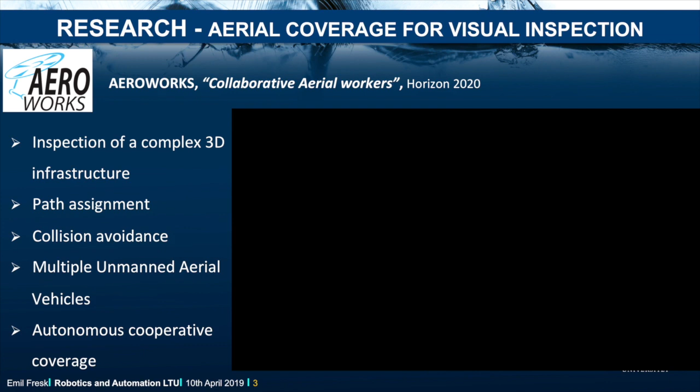So let me then start with one of our main projects. This one was called AEROWORKS, which was for collaborative aerial workers.

I will just check, is it muted? Because else it would go crazy. Yes. Just so we have it going.

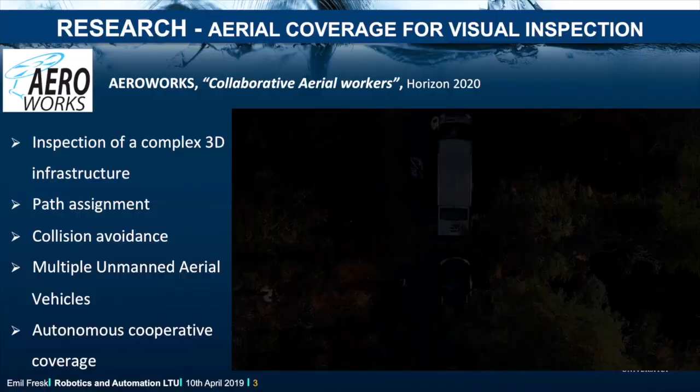The whole idea of AEROWORKS was that given infrastructure, in this case from our field trials in Bureå, Skellefteå, these wind turbine power plants or other types of infrastructure, inspecting this is currently done with rope teams. So you have people hanging with ropes from these tall structures. And it actually turns out, unfortunately, that people die due to failures of safety equipment or just simply being in a hazardous environment.

But what we want is this. Why would you send people when you can send drones? If this one can do all of the pre-inspection, so you only need to send people when you absolutely have to, I would always send the drone. However, making an application like this happen is not something that happens overnight. This was almost 4 years of research to have a fully autonomous drone, so there's no pilot.

It's simply a go button, where you have given the drone, or actually in this project multiple drones, the mission to inspect this infrastructure. And then it comes down to how they should fly in order to not collide with each other, not collide with the infrastructure, not collide with the forest below. All of this comes back to path planning algorithms, which in a sense is AI. They need to understand that I cannot fly into a tree, I cannot fly into an infrastructure.

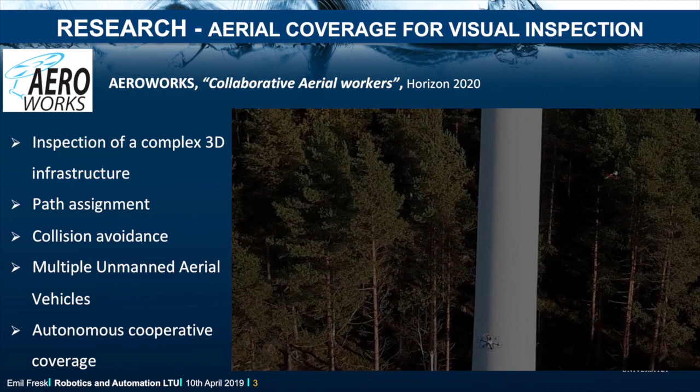And here, from the final part, when we have actually multiple ones. And what we are very proud of with this is also to be able to say that this type of system works when GPS fails. I don't know if you realize how reliant you are on GPS, but these types of systems work without GPS. Actually here, at this wind turbine, GPS does not work. It's a bit interesting. Simply because the wind turbine is such a tall tower, it actually disturbs GPS.

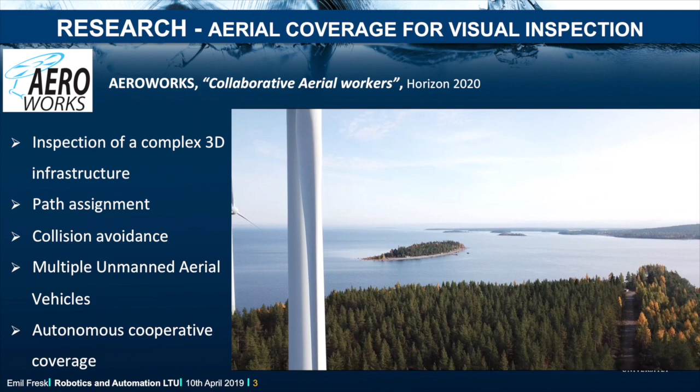But at the end of this project, AEROWORKS, we were actually awarded by IVA one of the top 50 engineering works for this work. And now, just recently, that was 2017, now in 2018, we were awarded one of the top 100 innovations for this work. So we hope that this will actually be picked up a bit more by, let's say, the industry.

But if I continue, what we're currently working on is the continuation. Before, we were inspecting large structures outdoors. What can we do if we have to go indoors? Or even worse, underground? In mining, I guess everyone has heard of some accident happening in mining. Tunnels collapsing, the roofs are not stable after blasting. What we want to come to here is

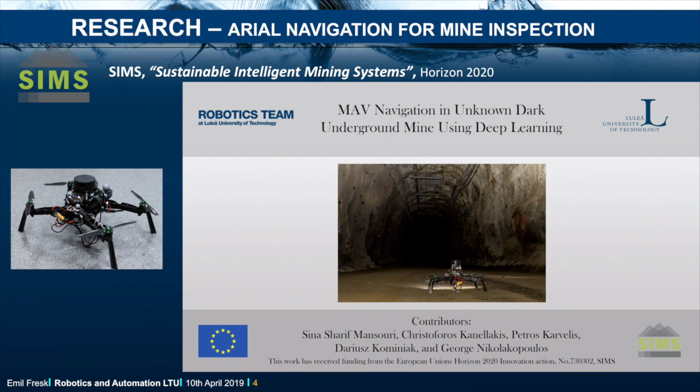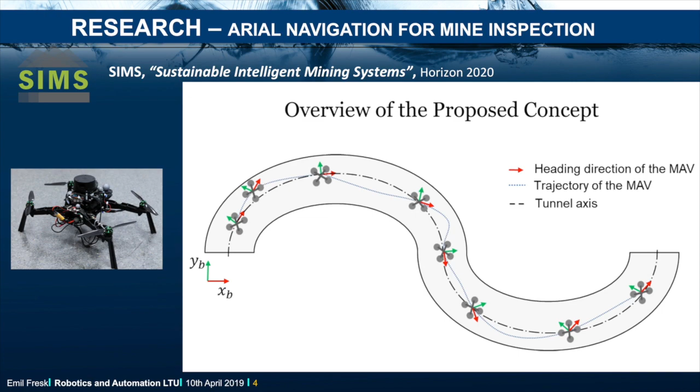use drones. So, what we've been currently working on, just to give an idea, here in SIMS, which is Sustainable Intelligent Mining Systems, is that we want these drones, without knowing the tunnels, or knowing a tunnel network from the mine, to be able to go, inspect, and report back: are these tunnels safe for operation? Or it could also be simply that there has not been a collapse of a tunnel.

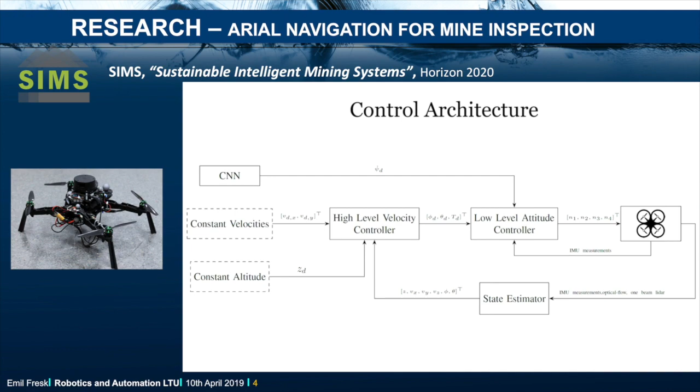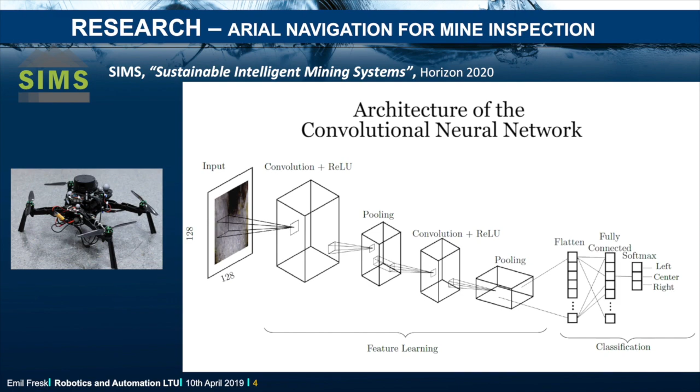And what we're going to see in this work is that to detect how to go into tunnels, you actually need machine learning. It turns out that many of our normal methods do not work for detecting tunnels. So here we actually have a convolutional neural network system that detects where the center of a tunnel is, to simply continue exploring tunnels.

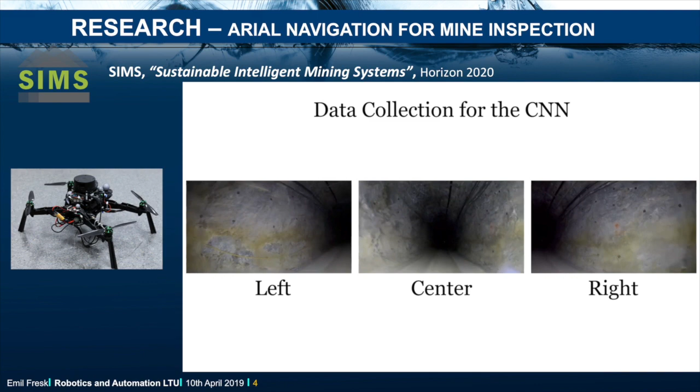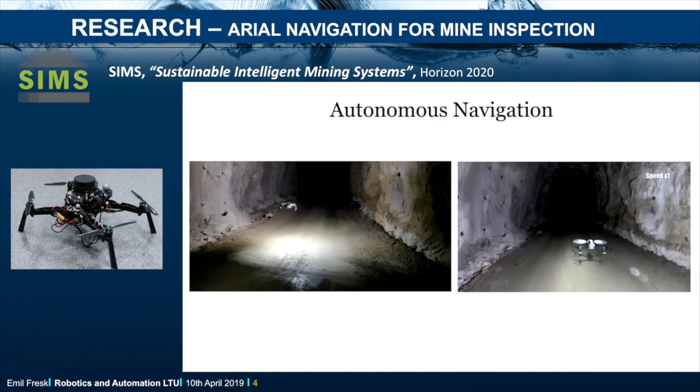So what we are doing in this type of system is we simply go in the tunnels, since we have no data here. So we need to start with data collection to figure out how do we move this? How would a camera see what is forward, what is left, what is right? This is then collected and implemented on one of our drones in our lab. And what it does in the end is, only by knowing darkness or specific textures of walls, it knows that it should go either forward, left, or right to continue traversing these tunnel systems. And you can actually see how it's looking for walls all the time.

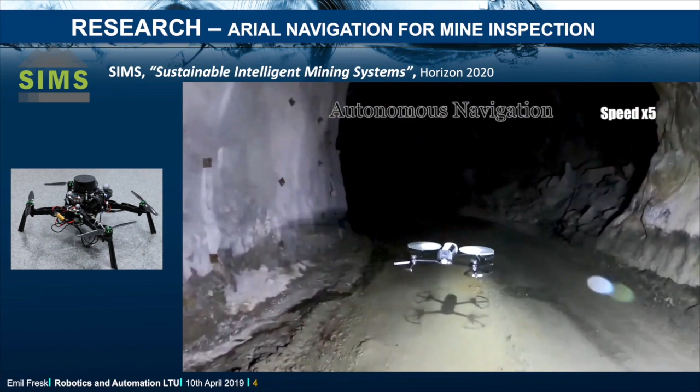And in our latest experiments down in actual mines, this is at about 800 meters below ground, 800 meters, we got about 500 meters, or until the battery ran out. These systems can now autonomously explore tunneling networks, where AI stands for the power to, let's say, not collide with a wall.

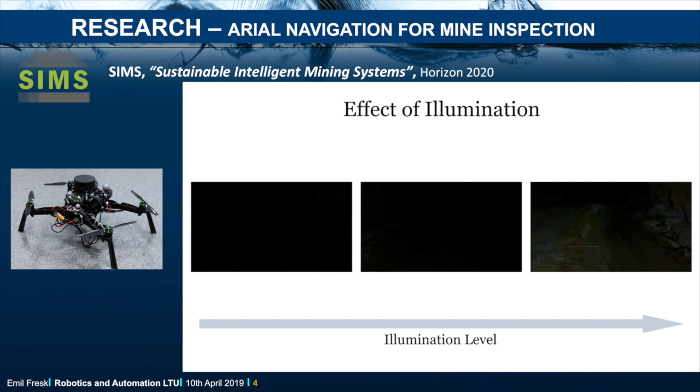But to continue with more of our work in inspection and maintenance, we have a large focus in our group on flying robotics. However, we also do, let's call them, climbing or ground robotics. And what has been under heavy development during the last years is what is now more commonly referred to as vortex actuation technology. What it means is a robot that can stick to surfaces without magnetic adhesion.

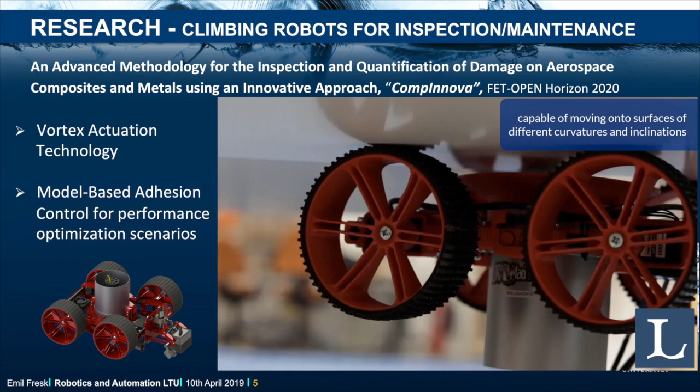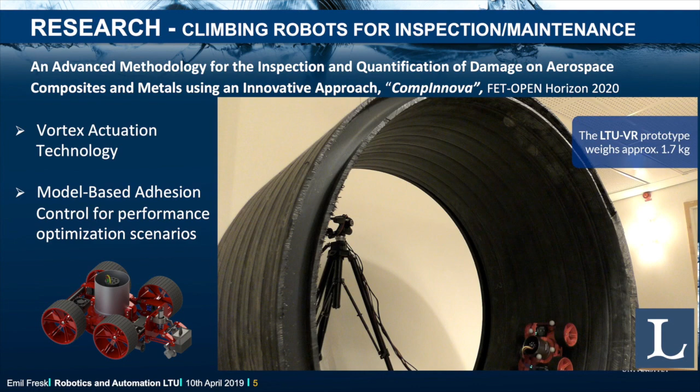So let's say, in this case, it is for inspecting airplane bodies. These are made out of composites, so you cannot have, for example, magnetic wheels to stick on surfaces. So what is done here instead is to simply use, let's say, a huge electric fan to suck to a surface. And then one can say, but this maybe doesn't sound so special.

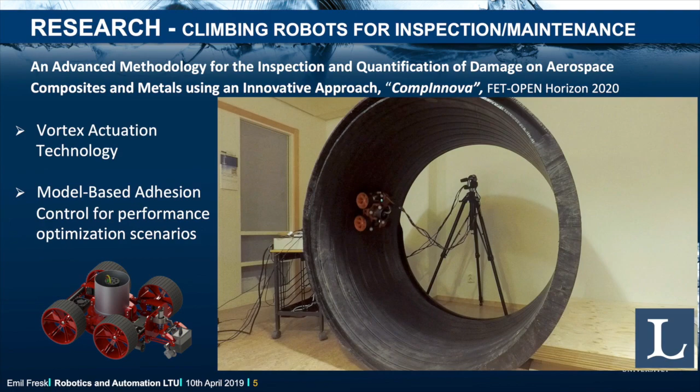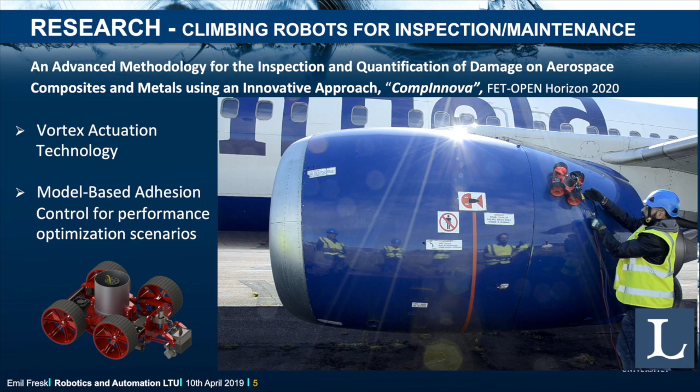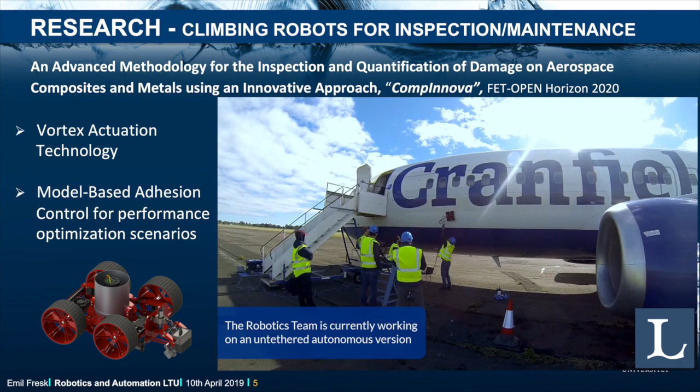Well, the interesting thing is, depending on how you place this electric fan and how the inlet looks, you can go from just about 2 kilograms of suction force, which is what this motor can generate, up to about, I think, 7 or 8 kilos, 7.5 kilos, only by doing the correct control of the distance between this motor and the surface. So we can more or less improve the adhesion force of this type of system 4 times.

So what this means is you can have it on an airplane, in this case, or other surfaces, but you can also carry the sensors. This is the important part. Having a robot on an infrastructure doesn't mean anything unless you get the data that you want for later analysis, which usually is finding faults, finding cracks, and similar types of faults.

And what is then the whole idea? Because now we've been showing examples. Well, the core idea of this lab is that we want to be able to take research that is done, fundamental research, and it shall be applied eventually in real life. But you must take steps to go from core research or fundamental research to experimental validation in real environments. And for this, we have the Field Robotics Lab.

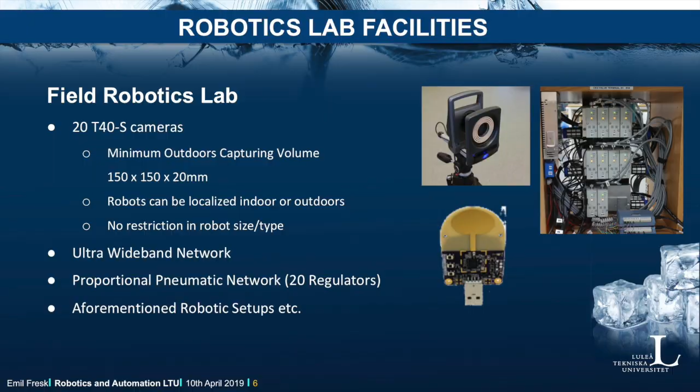And for humanoid work, which is also one of our research areas, we are using what's called the proportional pneumatic network, which simply is a way to control a lot of pneumatic muscles. It's a way to replicate human muscles using air pressure.